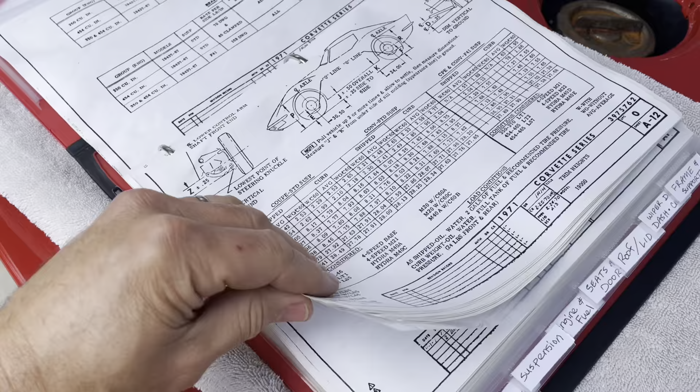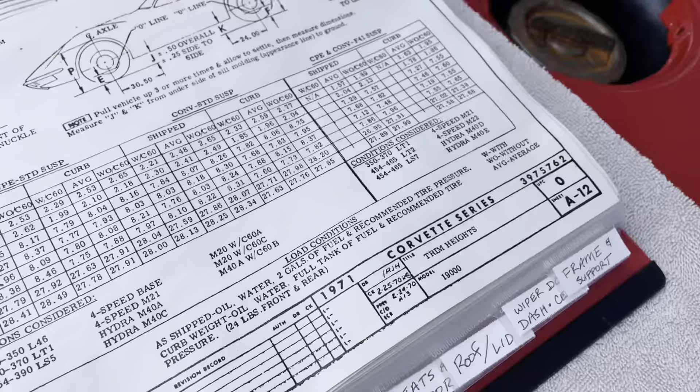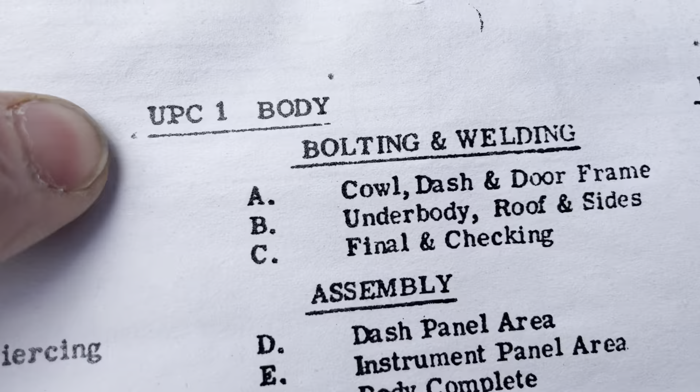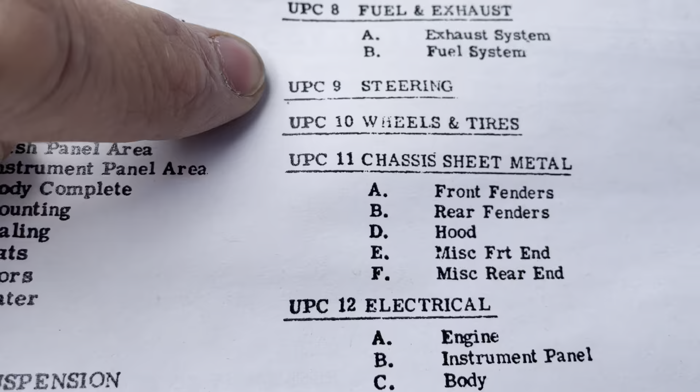But let me leaf through it real quick. Trim heights. So every page has what it's about down here, and it is organized into these UPC numbers, not the same as UPC codes. They have different codes. This number is throughout, so I guess this is probably specific to my car or year. If you look on the very first page, it gives you what's under each of the UPC numbers, but they're not always in order throughout, so it's kind of random. I don't know. But you see fuel and exhaust, steering, wheels and tires, blah blah blah.

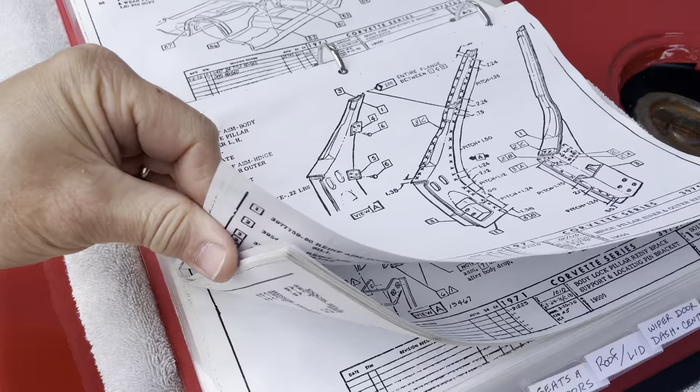So I've marked it in ways that are meaningful to me. So this is frame and support. I can find where, for example, I need to get the information when I do this work, because my car, I have to reattach the upper windshield frame. So I'll be looking at this. This part, there's information about that. Here's the lower part, all that stuff. So I'm going to speed through here. But that's some of the information that's in here.

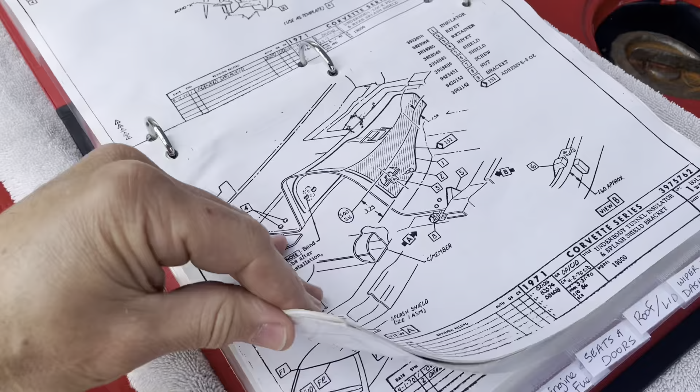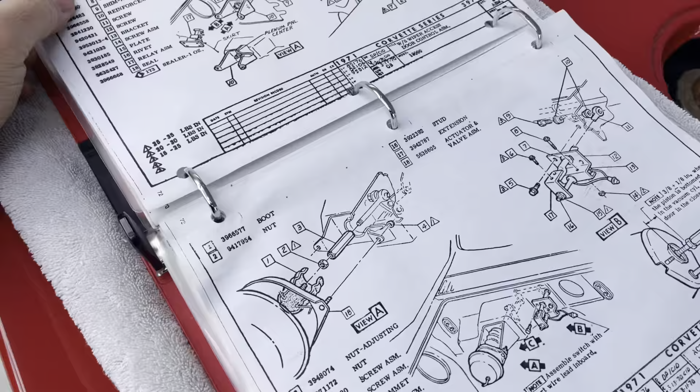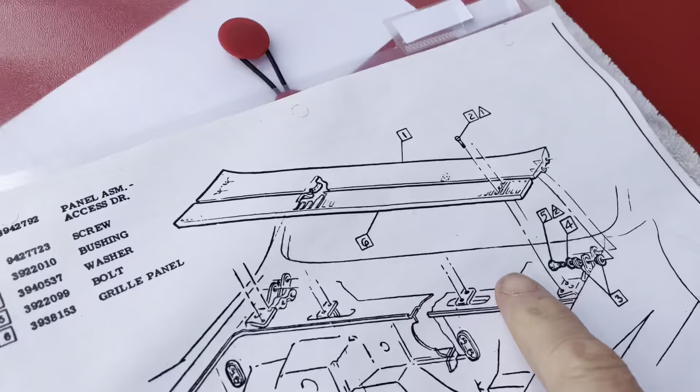But then there'll be other stuff, like here's the interior, some interior components. I've got one that's called wiper door and interior. So it shows how to put together the whole wiper door. And on this one, it has that vacuum actuated wiper door, which I know is a pain in the butt, but I like it. This one, I just think it looks nice. And I don't mind fiddling around with the vacuum systems, wipers and stuff.

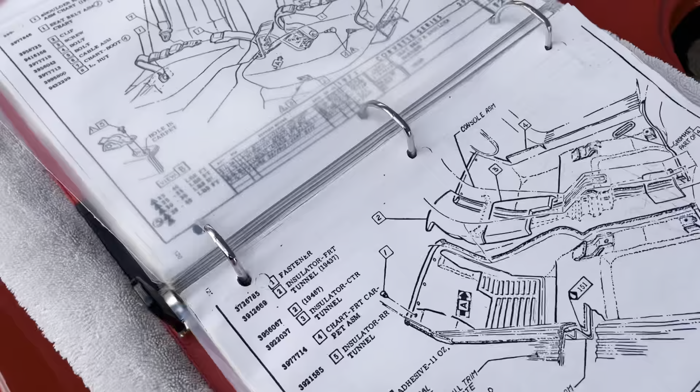Here's one I marked called roof and lid, because I need to put the deck lid on. This goes through all the molding, how to put the convertible deck lid together. Here's one I'm labeling as seats and interior. It talks about interior stuff, seat belts, trim, all kinds of stuff. I already have the seats together, fortunately. And then here's doors.

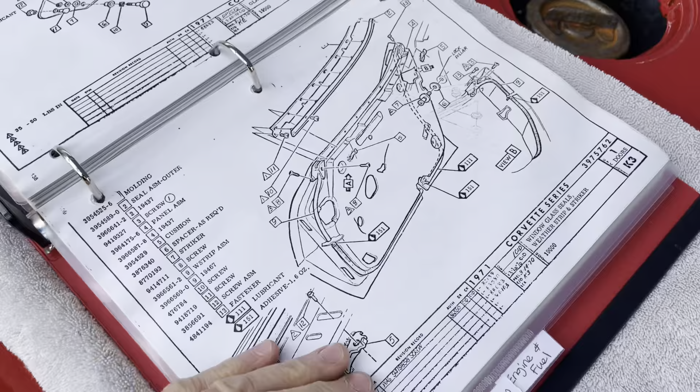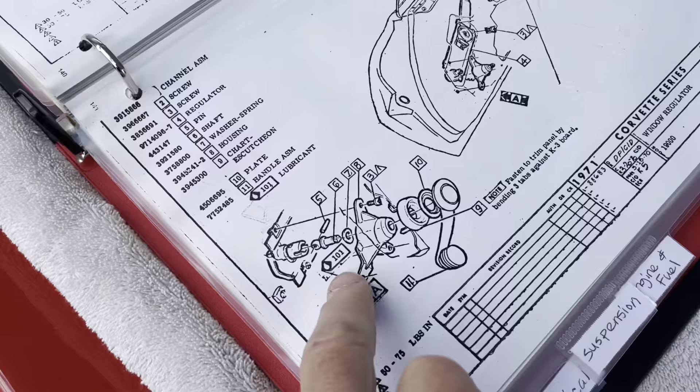Unfortunately, a lot of the printing is not always the best. And this, I foolishly put it in the oven to dry it out after it got wet, and it actually made the ink on the pages sticky and the pages stuck together. It just created a mess. I'm kind of an idiot in that way, I didn't know. But here's stuff about how to put the doors together. Fortunately, there's some good videos on YouTube about how to assemble Corvette doors.

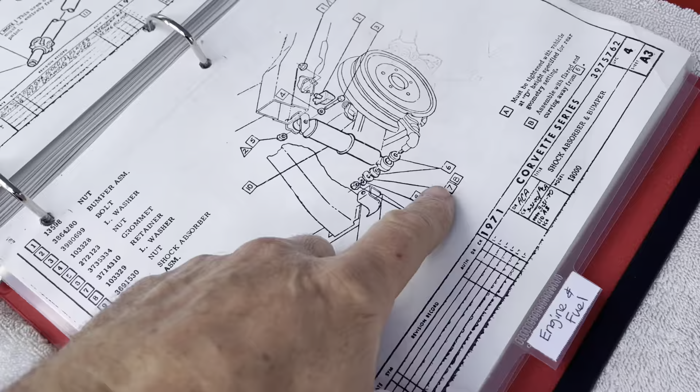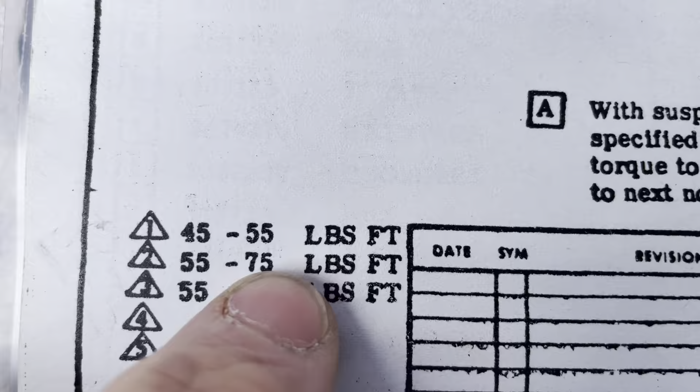Here's a tab called suspension. I've been looking at this one a lot lately. Front suspension, rear suspension. I was just on this yesterday, actually. It's a shock, and it gives you all the torque specs. For example, let's look at this one on the differential. Anytime you see a little triangle, there's a number, and then there's different torque numbers down here with the triangle. So if it's a number 2, 55 to 75 foot-pounds, etc. So it's good for information.

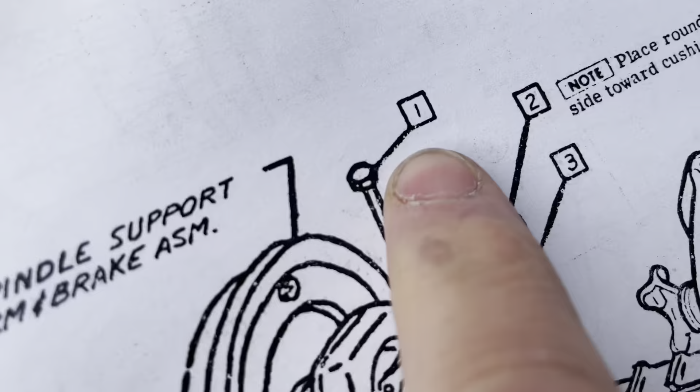It doesn't always give you the information on every bolt. It'll just tell you that it's a bolt, like number 1 here is bolt. It doesn't tell you exactly the specs on the bolt. That's the thing. So if you need to know, okay, is it a 5/8, and what's the thread, is it fine or coarse, you're not going to know from this necessarily. Maybe in some parts. But here's all the brake, master cylinder, all kinds of stuff.

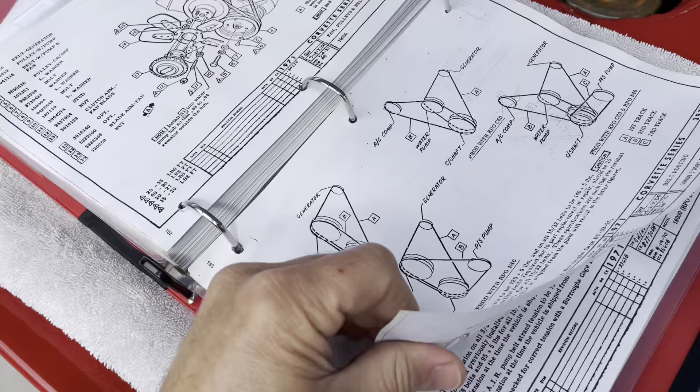So here's one I labeled engine and fuel. And there's an interesting thing in the back I want to show you. It gives you stuff like the belts, depending on the accessories that you have. You have lots of options there. And some of these are for different engine types. Of course, you have the different engine options. Here's one, so this goes on. There's a lot of stuff here. It's actually more than just engine and fuel, but you got to pick a category. So that's what I picked.

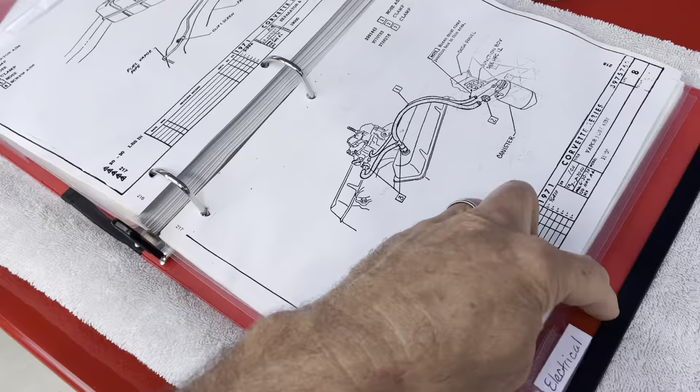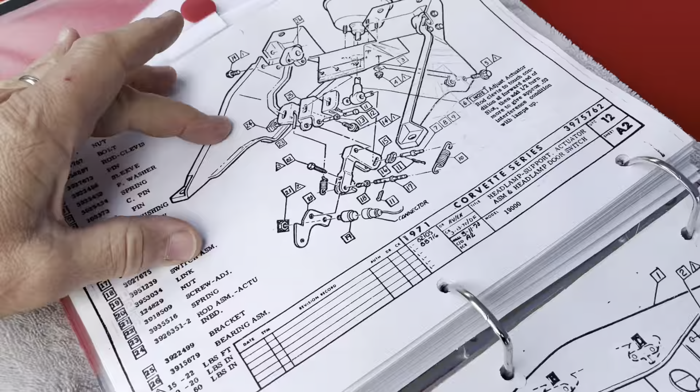Here's one called electrical, and that gets into, of course... well, but first, here is I'm going to be looking at this coming up because it's raining, I'll be working inside. Here's the headlight door actuator system. I'm going to build those soon, hopefully. But then it gets into electrical, all kinds of stuff about that.

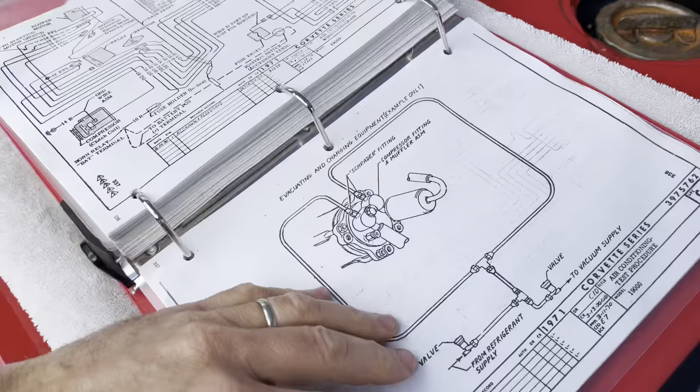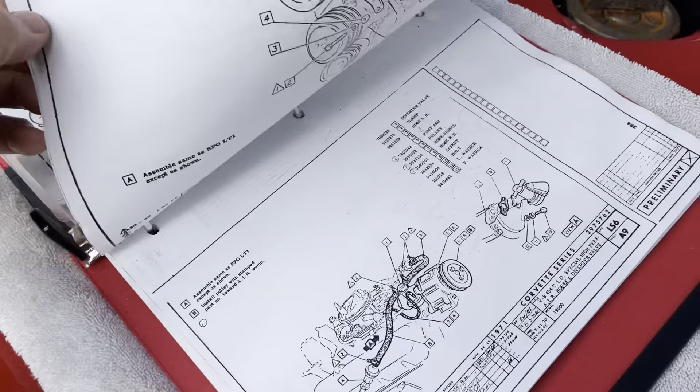And then miscellaneous, I want to show you guys. So then you have schematics too, back here, wiring, diagrams and things, different information. What I find interesting is back here. Let me see if I can find it. There's different information based on the different engine. So this is LS5, LS6, the coveted LS6. So different features, depending on the engines, all kinds of stuff back here.

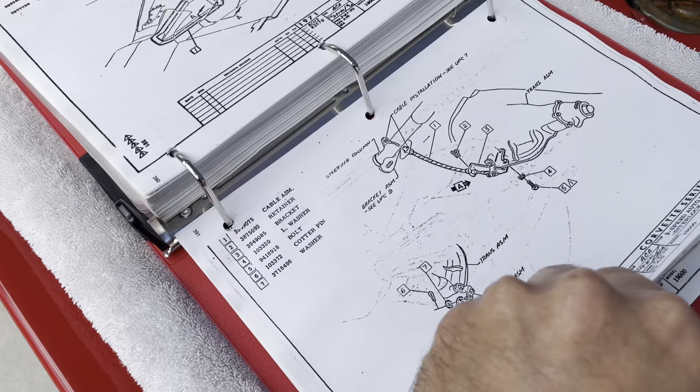And then it gets into more miscellaneous stuff. Here's some things on the drivetrain. It's kind of all spread out though. If you want really specific information, it's here, but you're not necessarily finding everything to do with the transmission, for example, all together. Like here's stuff on the shifter, transmission, steering, all kinds of stuff. Here's some radio.

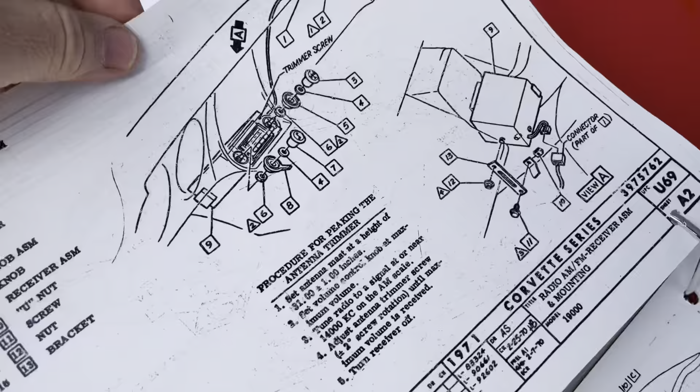Anyway, that's basically it. Yeah, that's it. In the back, I guess it ends with this, the radio. Some things on the radio antenna, how to hook that up. It's good. So I'm excited to have this all printed and organized, and that's it. And it matches the color.